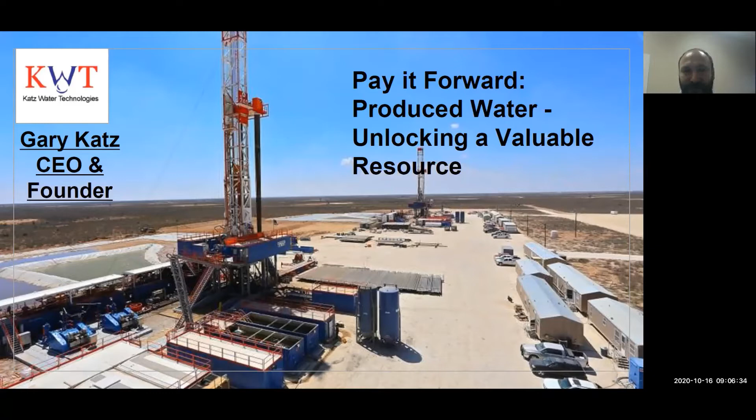My name is, as Salim mentioned, Gary Katz. My background is in technology with ExxonMobil, and then quite a number of IP law firms. I've had the experience of working for large corporations, medium-sized companies, and even startups, including now my own startup. So I've seen technology development in-house in a large corporation, I've seen it as an outside attorney, and I've now experienced it as a startup. So hopefully I can impart some knowledge to this group, and I appreciate the time.

So what I wanted to do is lay out the presentation. Whenever you try to start a business, you always have to start with the problem, because in order for a customer to give you money, whether for a service or a good, you have to solve a problem that's worth it for them. Then you have to make sure your solution solves the problem, and the fit of the solution to the problem is your value proposition.

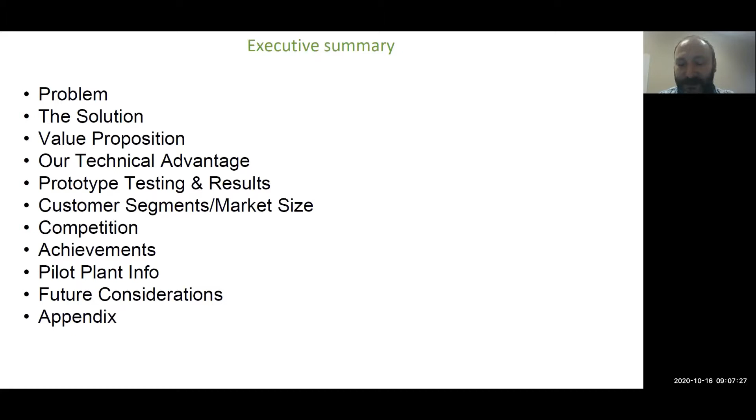A lot of people start with the technology, and we always have to make sure the technology is designed to solve a problem. We can never get the problem to fit the technology. So one of the most important things as an entrepreneur is to fall in love with your customer and your customer's problem, because then the customer will be willing to pay for your product or service, not fall in love with your technology. That's something I constantly have to remind myself. And that's the key to being a successful entrepreneur, particularly for engineers who are very good with technology. It's easy to fall in love with technology, particularly technology that you developed.

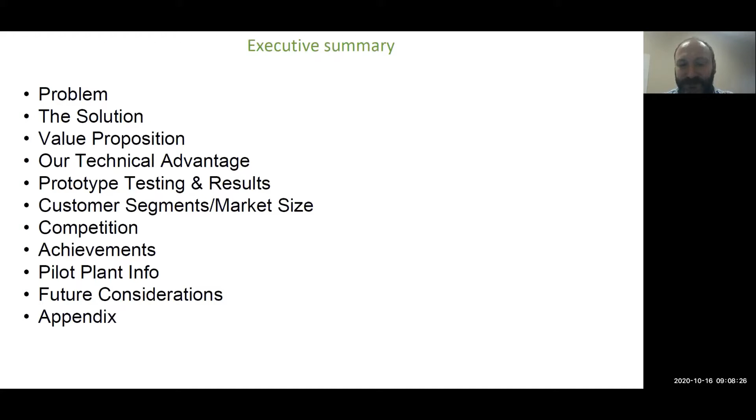Another aspect: we'll go into the prototype testing and results, and then go a little bit into the business side, the customer segments, the competitions, our achievement, and then future pilot plants that we're proposing, and other considerations if we have time.

So why did I start this effort? When I originally came up with the idea, water was very important. And as you can see in that map, Texas was in one of the worst droughts ever, and oil and gas at the time was booming, and we simply didn't have enough water for all the operations, and that included fresh water for operations, as well as the disposal water, which is typically disposed of at a disposal well.

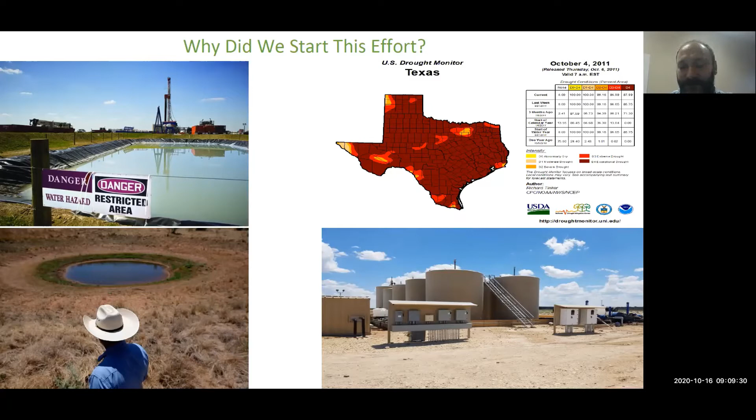And oil and gas was receiving quite a bit of bad PR, because they were competing with farmers and ranchers, and often farmers and ranchers couldn't farm and ranch because the oil and gas industry was using all the available water sources. Now, a lot of times the farmers and ranchers figured out that they can make more money selling the water than they can farming or ranching, but it was still bad PR. And of course, typically the media doesn't always tell the full story.

So what are some of the customer problems? We always mention that whenever you want to start a business, you have to solve a problem, and solve a significant problem that the customer is willing to pay for. So the problems that we were looking at were with the water, the infrastructure and cost issues.

Also, there's a huge gas flaring problem, and until recently there was no solution to it. The gas flaring problem is still there, but becoming less because we're drilling less. But if oil and gas ever picks up again, we know that the gas flaring problem is going to come back. And even though it's not as great as it used to be, it's still out there, and it's considered wasteful.

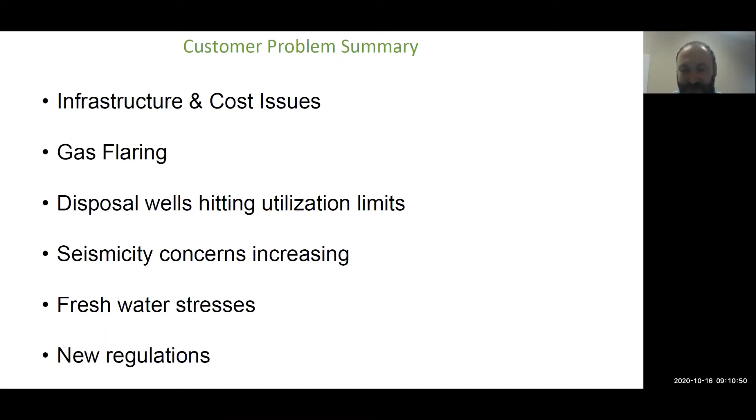We also have disposal wells. They're hitting utilization limits. As these disposal wells pressure up, we're having seismicity concerns. We also have freshwater stresses. We know a lot of these basins are in areas with stressed water. And everyone knows that in this industry, new regulations are constant, and everyone in the industry is expecting new regulations on water management.

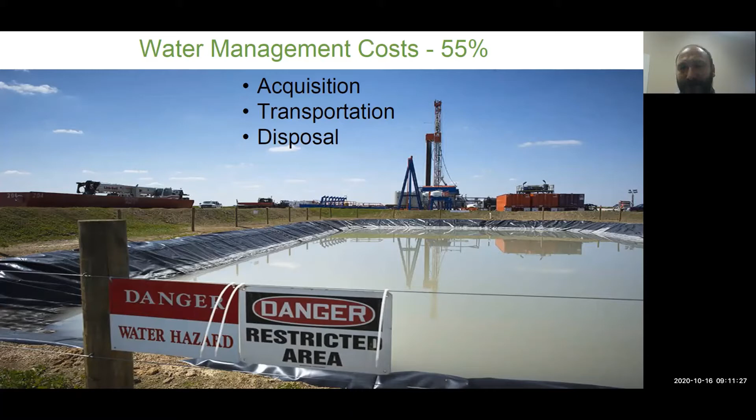So to basically understand the water management cost and how significant it is, in Texas, it represents 55% of the operating costs for a production well site. So that's the average well site in Texas. They spend 55% sourcing water and disposing it. And as you can see, it mentions the acquisition. The biggest component typically is the transportation, where you put the water in a pipeline or a water truck, and then the next biggest is the disposal.

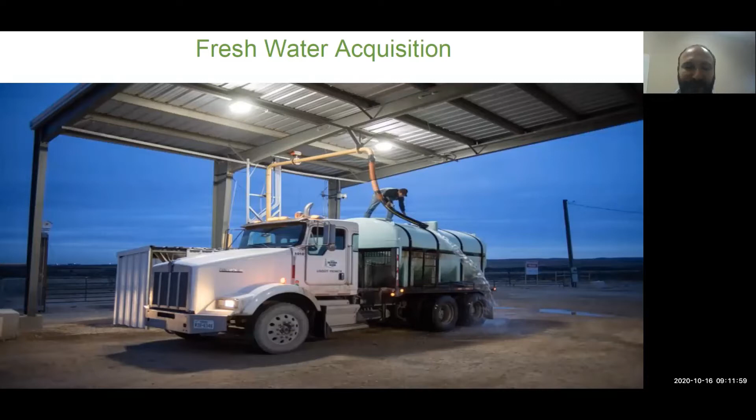So, freshwater acquisition: if you don't have a source of fresh water on site, typically it's put into large diesel water trucks and sent to the site. Now, more and more the industry is moving towards brackish, brine, and produced water, but there are some operations where you still need fresh water, such as if you're cutting the density of drilling muds or drilling fluids, and also some completions.

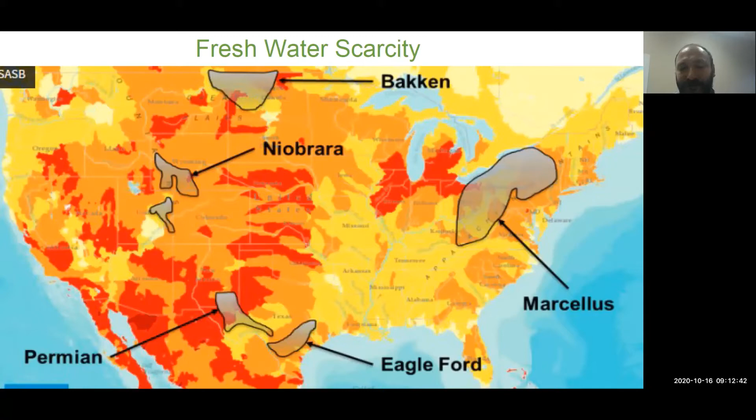Now, this is a map that shows freshwater scarcity and the degree in the U.S. And believe it or not, the U.S. is one of the better countries as far as scarcity, but you can still see that we have scarcity issues throughout the United States. And very often, the major petroleum basins, the oil and gas basins, are located in areas that are suffering from severe water stresses. So anytime you're taking water in these areas for operations, that means there's a PR and a political concern because there's that much less water for other uses.

I briefly mentioned the disposal. This is what a disposal well looks like. It's basically large water tanks where it's injected into a deep well under pressure, and the water is either fed by large diesel trucks like you can see in the bottom right, or pipelines leading into what they call gathering stations.

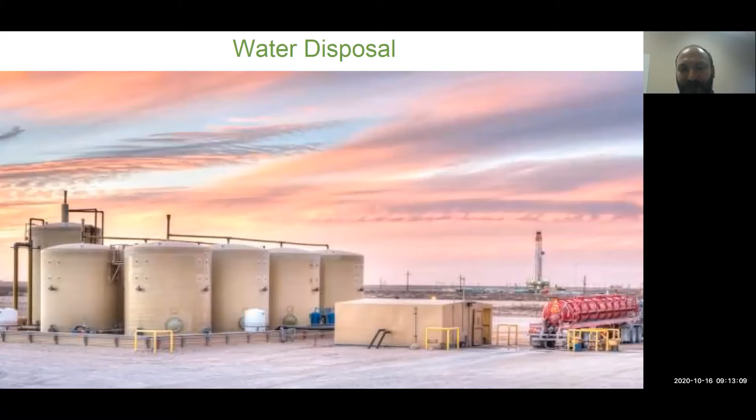Now this is a chart that shows the disposal well utilization limits. Now you can only pressure these formations so much before you run into serious issues, and typically the permits have volume and pressure issues, and more the disposal wells were hitting pressure utilization limits where they couldn't even put in the volumes that they used to because it was overpressurized.

So this was both a permit problem, and the problem was expected to get worse. It'll be interesting to see with the cutback of drilling if this problem's going away or it's going to continue. But even if the problem is reduced because of the reduction in production, once production increases, we'll see the same problem come back.

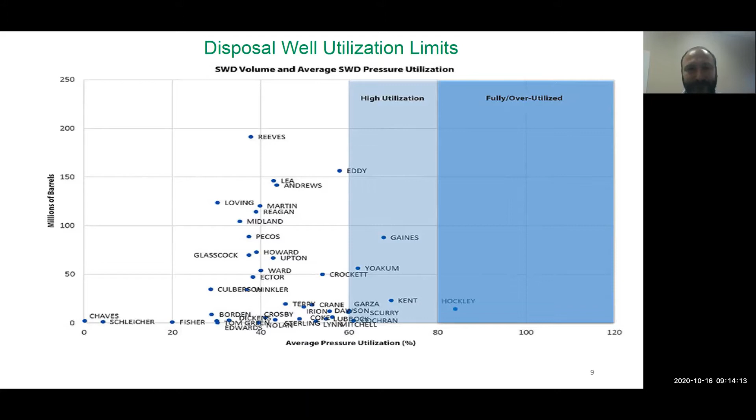Another area that's received quite a bit of media attention are the seismic concerns. And as you can see, this map shows quite a bit of increase in seismic activity, between 2009 over 2015, over the past nearly 20, almost 30 years, including Oklahoma, where they had several significant earthquakes that have caused problems.

And in Texas, we haven't had any major earthquakes, but we are seeing an increase of earthquakes, and it's directly correlated to pressure increases and pressure swings of disposal of water deeply, particularly if there's an aquifer, particularly if there's a fracture near the disposal well. And what we're discovering is very often it doesn't even have to be near a disposal well, because the pressure, depending on the formation type, can transfer over long periods of time, over long distances.

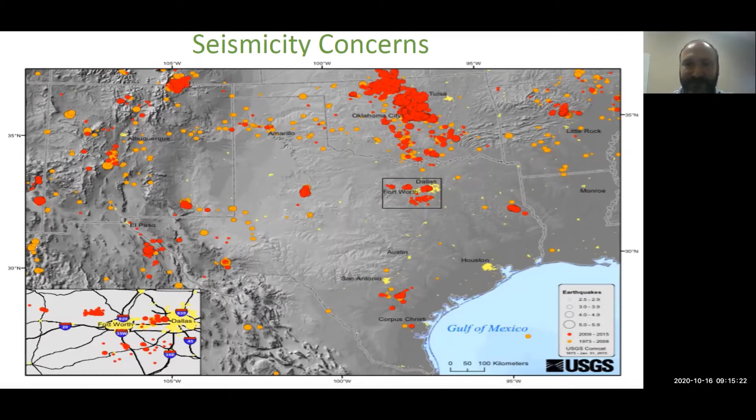Now, this is an interesting website, and this shows the increase. Texas and the Railroad Commission paid the University of Texas to put in a very sophisticated seismic monitoring system throughout Texas to understand the problem. And the University of Texas has been noticing quite a number of increased earthquakes over time. And so far, there hasn't been any significant property damage from these earthquakes.

But the concern is that over time, these earthquakes are going to become increasingly intense, like they did in Oklahoma. And in fact, Oklahoma had to severely cut back disposal wells, which seemed to help solve the problem. So the fear in the industry is if there's a major earthquake, there's going to be significant regulations, and there might even be regulations without a significant earthquake.

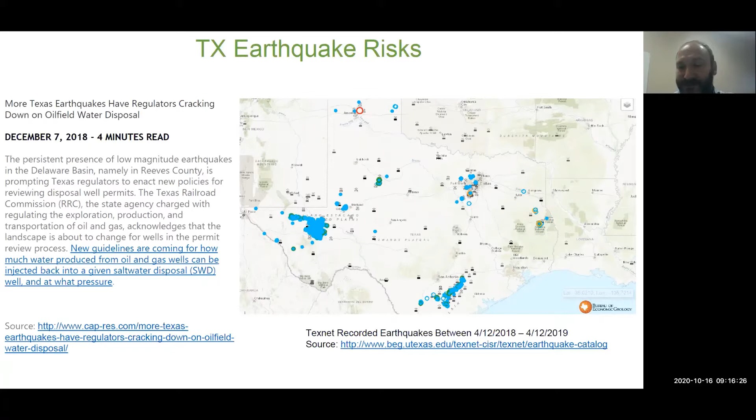And then you also have the water infrastructure constraints. Massive pipelines are being built. Some of these are hundreds of million dollar projects to move the water, both fresh water and the contaminated water, to disposal sites. And a lot of times these pipelines simply ran out of capacity. And as disposal wells were reaching pressure and volume, this had to be piped further and further.

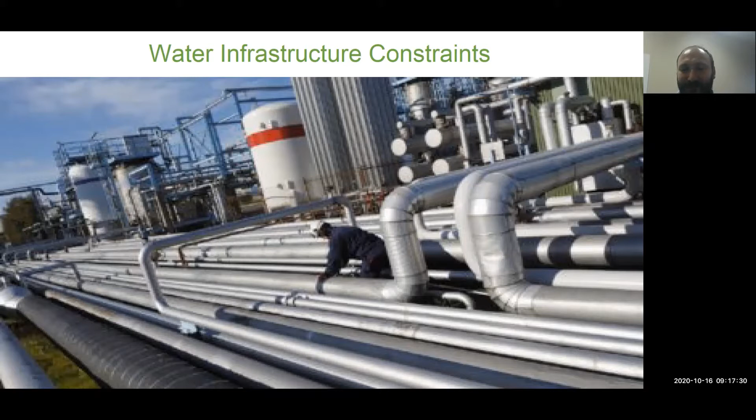In fact, in New Mexico, where water is much more of a significant issue, there was even a proposal to build a multi-billion-dollar pipeline system where water was taken from West Texas to New Mexico for the area of the Permian that was in New Mexico. And because New Mexico is much stricter on disposal and it's much more difficult to get permits, they were going to take the produced water back into Texas for re-injection.

And then finally, the other problem is gas flaring. Billions of dollars every year in the US and other countries is being wasted in gas flaring simply because there's no pipelines, or sometimes even when there's a pipeline, there's no market for the gas.

In fact, the Texas Railroad Commission recently had to issue gas flaring permits even when there was capacity in the pipeline, because the pipelines were charging to take the gas, and the producers said that if they had to pay the pipeline to take the gas, the oil field would become uneconomical. So in a 2-1 decision, the Railroad Commission ruled, very controversially, that you can flare for economic reasons.

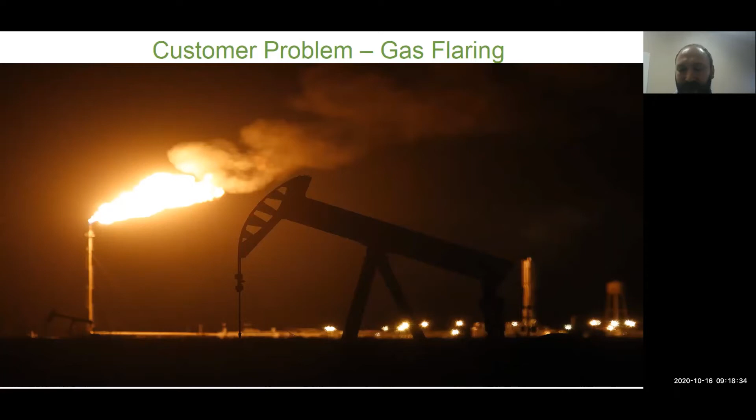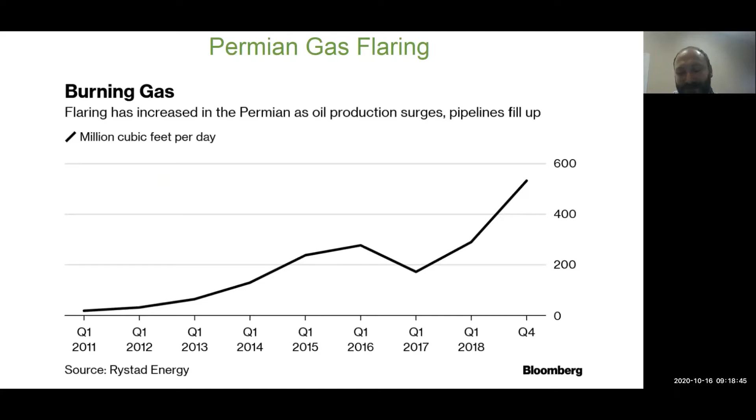There's a concern that depending on who wins the White House race, there would be stricter regulations on flaring. And this shows the massive increase in flaring. I need to update this because recently flaring has gone down with the production, but it's still a significant problem.

However, fracking is, depending on which basin you're in, 5 to 10% of the water management issue. So almost everyone is focusing on fracking, and there are companies that are already recycling the frack water. Typically they'll take flowback water, produced water, and they'll filter it to remove the suspended solids and to kill the microbes, which if not treated will cause organic fouling through a microbial explosion. They oxidize it, typically using chlorine dioxide, which is very cheap and very effective, sometimes ozone. And then that water could be reused.

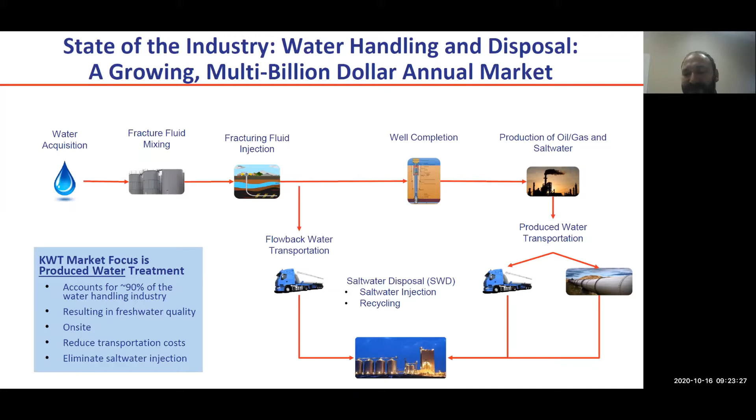Now, to give you an idea of the significance of the problem, in Texas, on average, for every barrel of oil produced, we're producing 8 barrels of water. And that heavily contaminated water is very often put into a pipeline, or put in a water truck, which are diesel, typically 18-wheeler Mack trucks, and sent to a disposal site. And it's very expensive, and there's environmental concerns with destroying the aquifer, as well as societal concerns that these trucks, particularly in rural areas, are causing traffic. They're ripping apart roadways. So anything we could do to reduce this has a societal, environmental and economical benefit.

So we mentioned that in order to have a successful business, you have to minimize or reduce pain points. And the problem is so vast, no one's going to solve this problem. So we have to minimize it. So our solution is to take the gas, which is very often very cheap because there's a glut of it in the U.S. Even the Henry Hub price is very low. And speaking to most of the gas producers, there's very little value in this gas, and very few are getting even the Henry Hub price, which is historically low. And some are still having to pay the pipelines to take the gas. So either take very cheap energy or gas that's being flared and use it to purify the produced water.

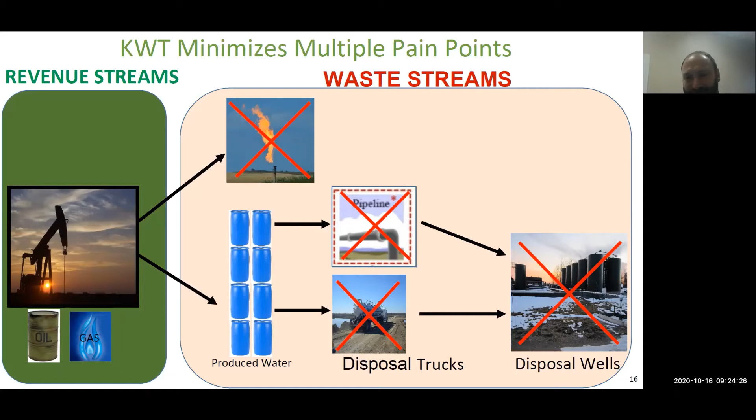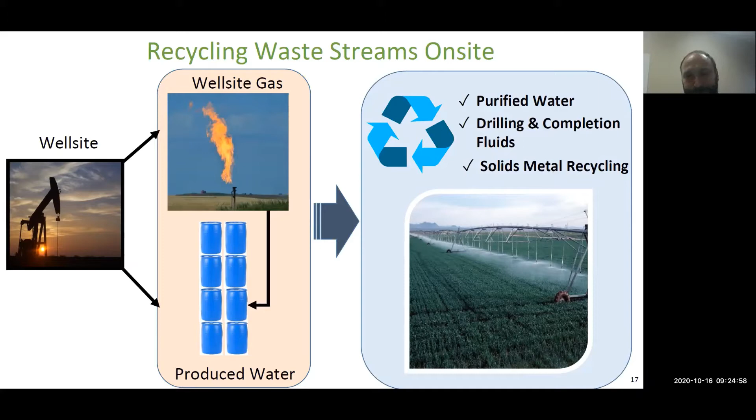And the goal is to reduce or eliminate as much as possible the pipelines, the disposal trucks, and the disposal wells. So what we want to do is take the gas, produced water, purify the water. You can use the water on-site, or use it for agriculture, give it or sell it to farmers so that there could be more farming and ranching in areas of water scarcity. And the discharge brine we could actually reuse as a drilling and completion fluid by controlling the density. So eventually creating a new on-site business model.

So the cost of disposing this production water is all over the map. If you're lucky and you have an on-site disposal well, the cost could be anywhere from 30 to 60 cents a barrel. If you have to pipe it, it could be anywhere from 10 cents to 50 cents a barrel. If you have to send it by a water truck, the cost is actually $1 and up. So the moment a water truck shows up, you know that the transportation cost is a minimum of $1.

And in fact, in certain basins like the Marcellus, which is a very important gas production region, and gas condensate, liquid condensate, they have to pay between $4 and $8 a barrel. And the reason why is Pennsylvania banned all disposal wells, so there's only a handful that are grandfathered in. So the water has to be trucked from the Marcellus in Pennsylvania all the way to Ohio for disposal.

So it really depends on where you are. So in Texas, which we're targeting, we figured a sweet spot would be between 50 cents to $1 a barrel, and we would target the well sites that have to bring in a water truck, because then we know that the cost is well over $1, typically $1.30, $1.50 or above. So then, if we could charge them to take the water off their hands, we could charge them between 50 cents to $1 and have a significant value proposition to them in reducing their disposal costs.

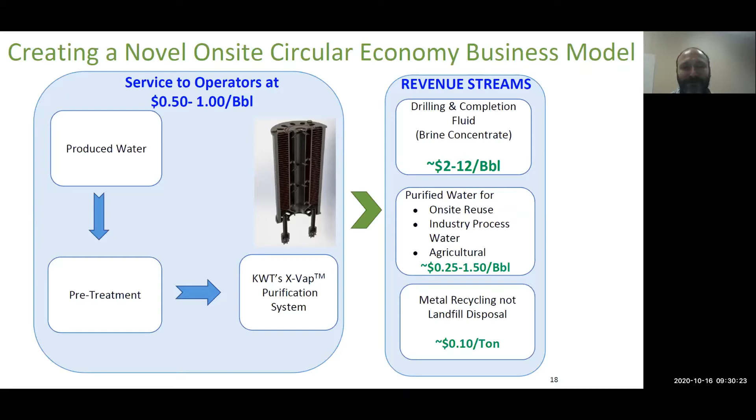So we have a great team. I brought in quite a lot of people. Jerry's been advising me. I think he's on the call. Paul Smith, many of you know him. He was formerly with Weatherford. He's our chief product engineer. Ramesh and Antonio. A lot of people have helped me.

Initially, when I had absolutely no money, I was bootstrapping. I couldn't even pay friends and family. And they did it for experience, and I'm very appreciative. And one of the things that I would point out is that quite a number of people helped me out in this entrepreneur's group. Not everyone I was able to reimburse, but several people who I never paid were actually able to use me as a reference and get jobs. And several people on the team right now were helping me out and even volunteering their time, and now I'm paying them through grants and money from funds and money that we've raised for the startup.

So what is our technical solution? As you can see, this is our first generation prototype. What we invented, patented and developed was a new thermal distillation system. For anyone who understands thermal distillation, or at least the process that we use today, it's a very complicated process, and there are large chemical plants that have to perform this.

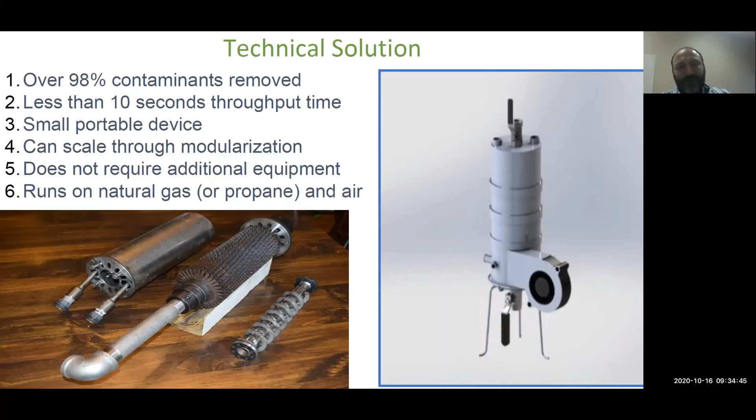And then for condensation, we can attach a pre-warmer, put a heat exchanger, so that not only do we condense it, but we also recapture energy and make the process more efficient. And we built our first prototype, and before we built it, we had to run simulations.

Here you can see an ANSYS Fluent simulation, in which we saw how effectively the heat will be transferred from the combustion chamber to the fin tubes. Now, to simplify it, we had to show each step separately, and here you can see the transfer of the heat energy to the water flowing down. And what the simulation showed is that as long as we get it to over 1,000 degrees Fahrenheit, the majority of the water can be converted to vapor.

Now, these simulations are very important. In fact, I'm looking for an ANSYS Fluent simulator going forward, and Carlos is working with me to help us find a candidate. So if you know anyone that's experienced in ANSYS Fluent, and particularly if they have a recent PhD, we can get them in through a very great NSF postdoc program. But if not, I'd still be willing to talk to them. And that can do multi-phase flow, both liquid and vapor, which is very difficult, but very valuable for what we're doing.

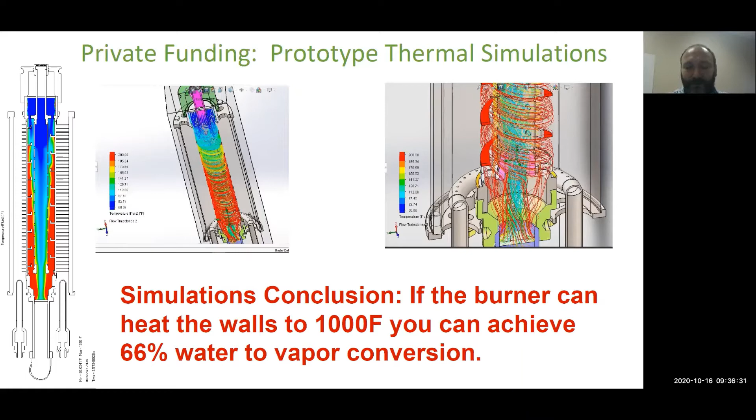So I'd like to thank Carlos, and this is how a network can help. Carlos is starting, with others, a company to help companies find talent, and we're working with him. So, like Carlos says, you want to have as much networking as possible.

So here you can see our prototype testing. This is our first generation, very simple device. You can see the scale, very small. We were testing it in both Paul's garage and my garage, and we were powering it with propane gas. Now we're running it on natural gas or compressed natural gas, and condensing it into a bucket. We don't even have the pre-warmers.

And with this small little device, we were able to remove over 98, now we're over 99% of contaminants in a single pass-through of under 10 seconds. And what is really unique about this is there's no mechanical moving parts. It's gravity fed.

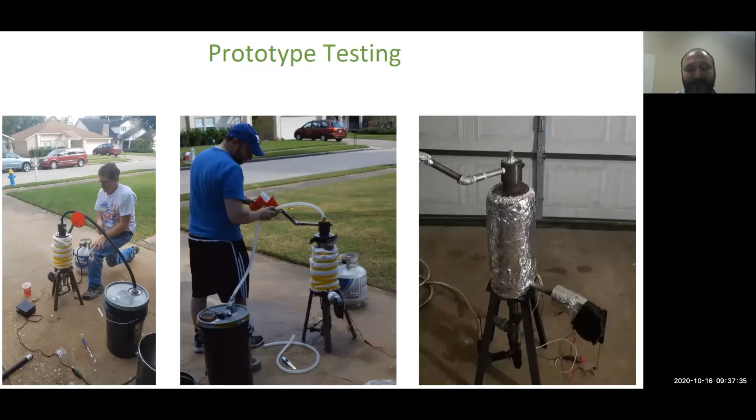So the only thing that will cause a failure is corrosion, fouling, or scaling. And because it's a short residence time of under 10, now we do it under 12 because we're using slightly bigger equipment, there's not enough time for scale and corrosion to form, which is very promising. You can see our lab results.

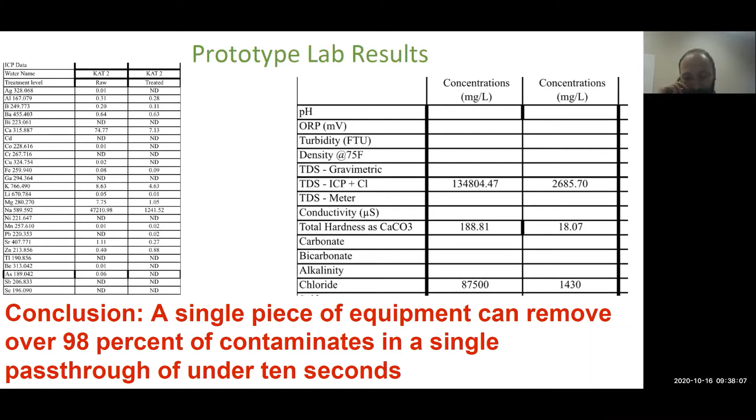Now, what we did is we took these lab results, and initially I applied for NSF funding. I tried to get investors behind me. No one believed it. Once we actually bootstrapped and were able to build a prototype, I had to beg a family friend to lend us some money to do this. We were able to send this to the NSF, and they gave us phase 1 funding so that we could build better and bigger systems and field test it.

While we were there, a water truck showed up, and we were able to talk to the water truck driver, and he gave us some very valuable information. That same truck also delivers to well sites both fresh water and brine. He even knew a little bit about the pricing structure, which confirmed to us that if we were able to produce fresh water and brine on site, instead of having to pay that truck to take the disposal water, that truck can then be profit or revenue generating, taking fresh water and heavy brine to other sites.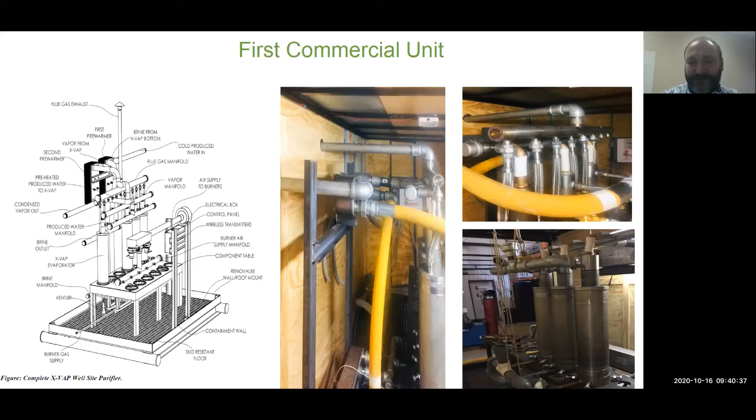So basically, you can see the evolution of the technology from a simple modified heat exchanger to actually a system, to putting it inside a trailer to be able to run it on site by simply connecting to the water line and gas lines.

So we're proposing some field trials, some larger ones with a major and an independent that's probably just below major. And so we're doing schematics of how to do it. This would be at the water gathering stations where they're re-injecting, where we attach our system and then have the trucks take the brine and the water to the different storage tanks or to the end users.

Now, one of the most important things we had to do throughout the process is customer discovery. And we worked with several different organizations. Probably the best one was what's called the NSF I-Corps program. And they have different versions of it. The main ones are a regional program and a national program. And the regional program is run by a regional node where several of the universities are running it. University of Texas, Texas A&M, and Rice are among them.

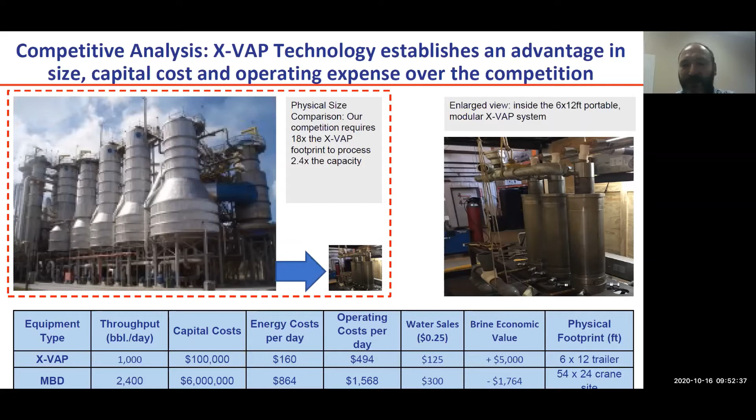So it just shows that thinking outside the box can scare even the largest companies in the world with the bootstrap technology that was developed in a garage. Now, even though Veolia considers us competition, I know better, we're not, because no one's even remotely considering using them. So our competition really is the disposal wells and the midstream companies.

So IP, it's very important because once you prove a technology, you have to protect it, so we filed patents. We have 3 issued. We actually have 3, instead of 2 out, it's now 3. We have filed 13. That should be 15. We filed 2 more. We've trademarked some of our names, copyright, and then even trade secrets are important. So our algorithms, our operating data is very important. So if someone wants to see that, we require them to sign an NDA.

So what's our go-to-market strategy? Now, I am talking to some of the biggest companies in the world about doing a large pilot plant, but really, right now we're funded with an NSF grant. It's just enough to get by. We also borrowed some money from investors. But really our commercial pathway is to go to the small family-owned offices, like the family that owns that small production site in Spring, Texas. And that's typically less than 1,000 barrels a day. At that site, it's about 100 barrels a day.

And you can see the test samples from that site where you have the produced water. We concentrate it to heavy brine, and you can see the condensed vapor, which is fresh water quality. So that water was approximately 150,000 TDS. We condensed the brine to right around the 10-pound drilling mud, which is around 260. And the purified water is under 500 TDS, which is actually fresh water drinking quality. But EPA regs will not allow us in the US.

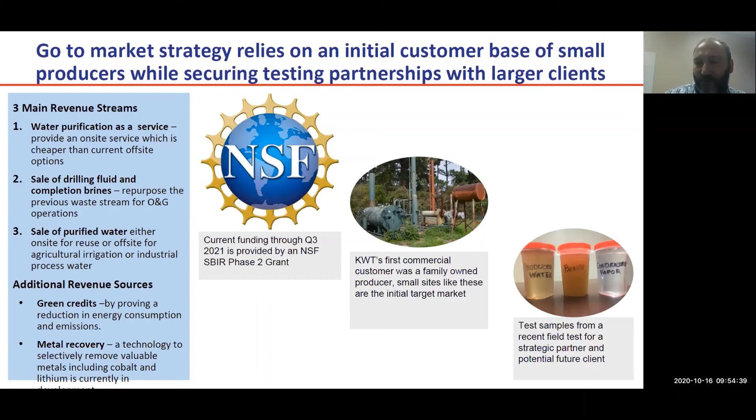Maybe in other countries, this would be better drinking water quality and could be used as drinking water. So we had to do revenue and show that we had, for investors, a profitable margin. But because we could take a costly water product and recycle it into valuable components, you could see we have the potential by adding 12 wells a year and then doubling it. These are very small wells of under 1,000 barrels per day and have a very sustainable revenue model in there. Based on our market research, there's approximately 8,000 wells that initially we could target.

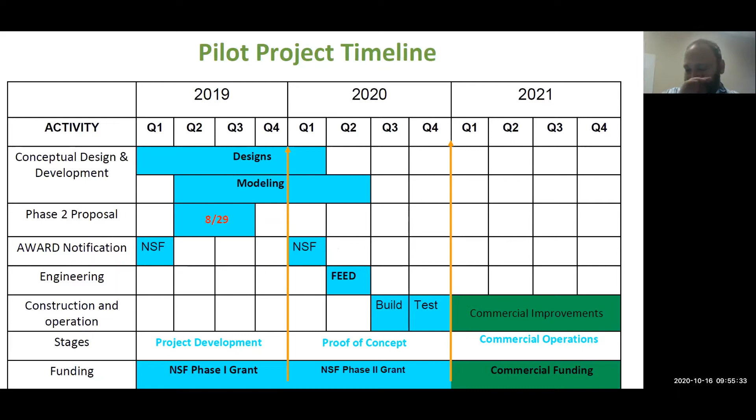So this is our timeline. I know I'm running out of time. So you could see last year and this year we were funded through an NSF grant that's going to run through 2021, in which case we're going to have to transfer to commercial funding and commercial improvements. So I'll go quickly over our proposed field trial. This is a larger one.

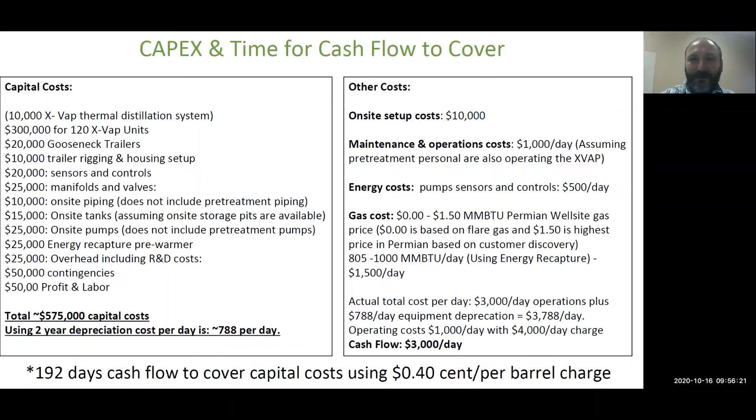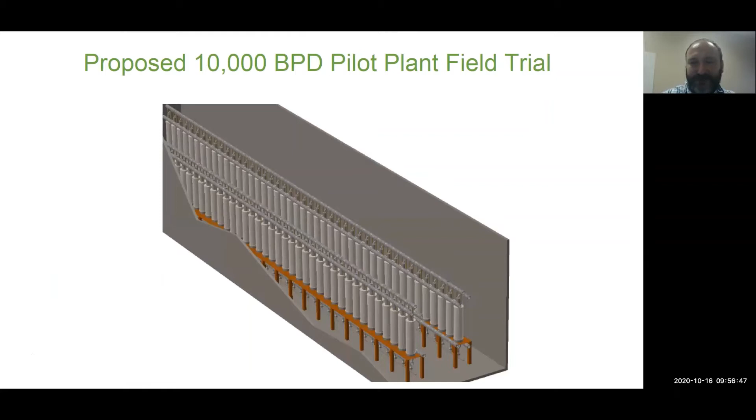Here we have a site placement and flow diagram for 10,000 barrels per day. And this is a rendering of our X-VAP thermal distillation system in a shipping container to show what it looked like on site, so we could scale up by putting additional shipping containers. We're not here yet, but our goal is to get there in 2021.

So considerations with working with these companies: confidentiality. Some companies want absolute confidentiality, some don't. The cooperation structure. Are we doing this as a research project? Are we doing this as a consultant, a contractor? Publicity. Some want publicity, some don't. And inviting other parties. Benefit will be cost sharing. Some companies are willing to work with others. Some want us only to work with them. So those are all considerations. We're working with investors. There's matching funds as far as our NSF grant, and we've also taken some loans.

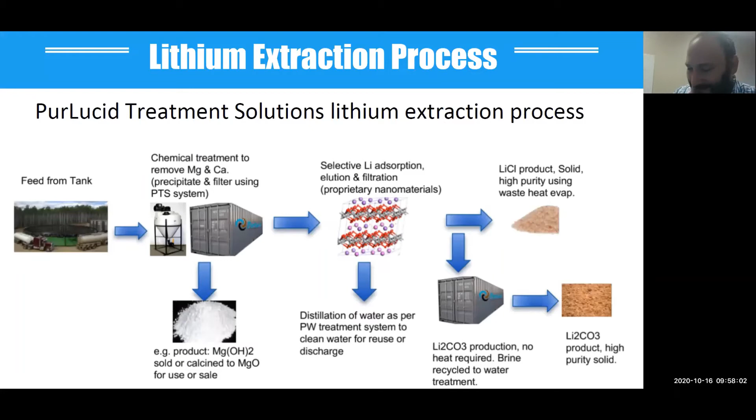Another interesting component that we're working on is people are looking at extracting valuable metals and minerals. We've talked to PurLucid, which can extract lithium if it's in greater than trace amounts from the produced water using their technology, and we could do a license agreement with them.

More interesting technology is I'm working with a company called New Arrow, and they were a technology spinoff from Statoil, and they have a microbial process where initially they injected microbes. Now they're injecting nutrients and causing a microbial explosion of microbes that can repel water but will allow hydrocarbons through. So for an EOR situation, it's very valuable because it increases the hydrocarbon recovery rate while reducing the water.

So we're actually now working with them, and we filed several patents on using microbes to selectively remove valuable metals and minerals. And we found microbes for just about every critical material out there, including the ones that they're scrambling to find domestic supply for because most of it is coming from China. Lithium, nickel, cobalt for batteries, and rare earth elements for the high tech.

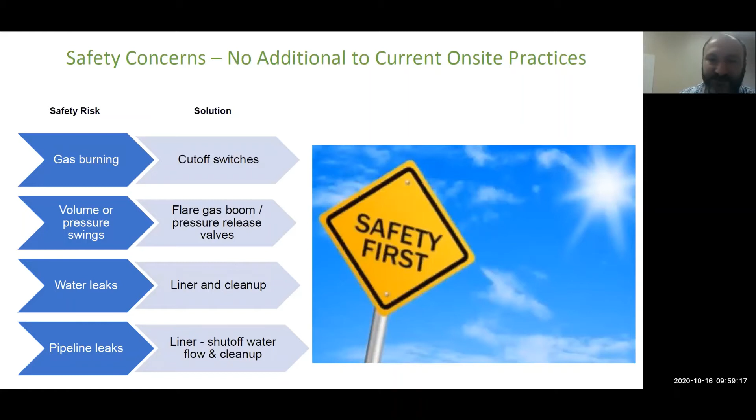So for the safety concerns, we had to do this for one of our majors, show all the safety considerations, ESG, the sustainability benefits. Now sustainability has three components. You have your economic, which are the benefits, which is reducing costs and recycling. Your environmental, which is reducing freshwater withdrawals, reducing seismicity, and also the vehicle miles traveled emissions. These are heavy diesel trucks producing considerable CO2 with the runs on the water trucks.

And the societal benefits. So we want to reduce the depletion, use less fresh water for oil and gas, and then reduce road congestion. And by reducing the cost for the producers, we're making energy cheaper for everyone, and that's a net benefit because when energy costs rise, the ones that are hurt most by it are the poor and middle class. So all these are benefits to society.

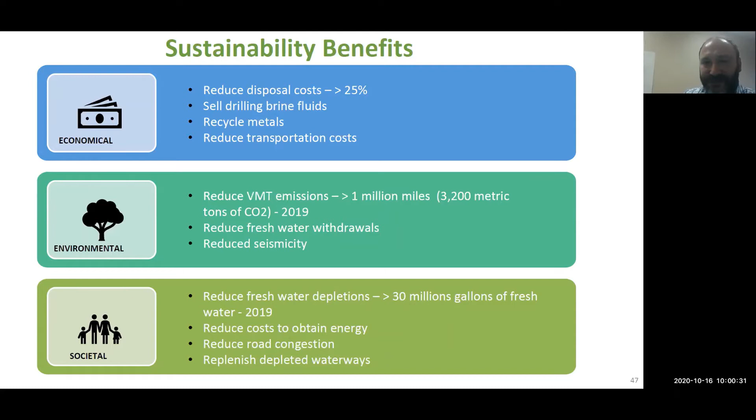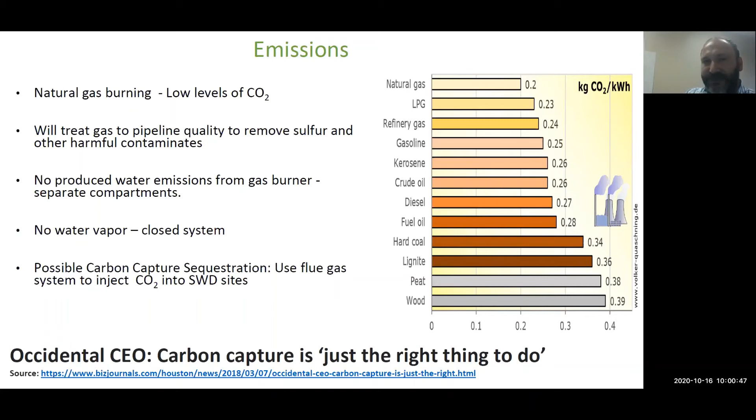We talked about the emissions, natural gas as one of the lowest emissions, and we're even working on carbon capture. Since we're going to be at the well site and burning the gas in a controlled manner, we can re-inject the CO2 we produced on site. So we have a number of achievements, and I think I'm out of time.

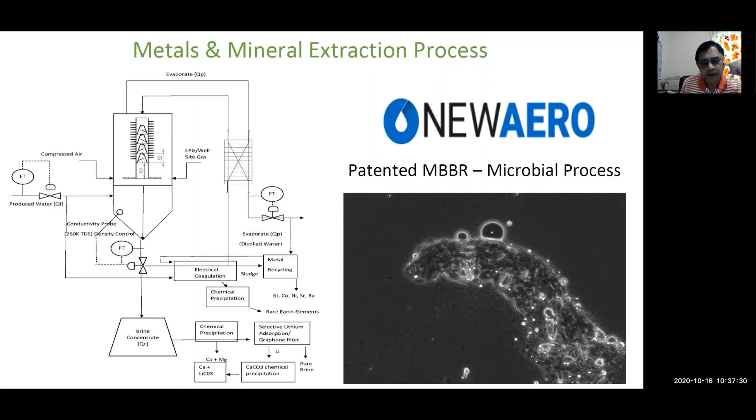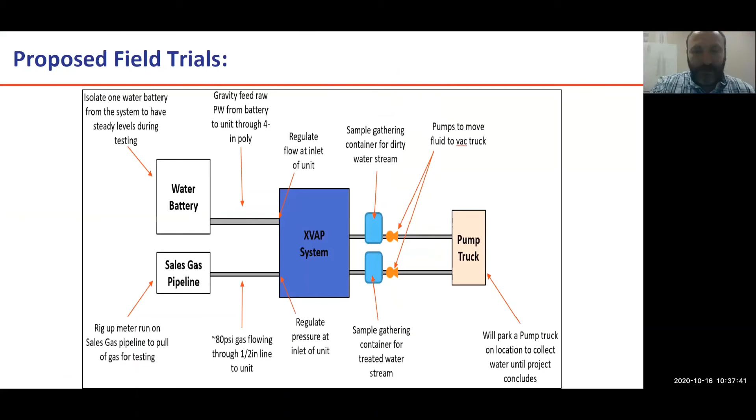Hey Gary, can you use a pointer? Do you have a pointer available some way? No, I don't. Being a tech startup, I should probably be high tech, but I'm not. Yeah, that's causing me difficulty following what you're saying. You've got to kind of point it. Let me see if I can find a simpler diagram to show what we're doing. Okay. Does the cursor show on the screen? Oh, you want me to use a cursor? Yeah, why don't you use the cursor, please? Okay, that would be good. I'm no longer looking at people, so if they want to, they can actually make faces at me. No, that's fine. Don't worry. Okay, so can everyone see the hand?

Yes. Okay, so as you can see right here, we have the XVAP thermal distillation system. What we do is the gas is coming in on the bottom. We have an air supply coming in here. We have the mixture of gas and air in a combustion chamber with the fin tube heat exchanger that transfers it. Now, in here, one of these is the produced water coming in, another one is a brine exit line, and the other one is a vapor. So the flue gas comes in here and it comes out this chimney.

If we were to capture the CO2, we would have a capture system, maybe some type of almost like a catalytic converter to remove everything but the CO2 and then re-inject the CO2. These two devices are plate heat exchangers. Those are pre-warmers, one for the brine and one for the vapor. The condensation occurs when we run it through the pre-warmer, where the produced water coming in is warmed first through the brine, then the vapor, and it's very hot, almost at thermal distillation before it gets in the system.

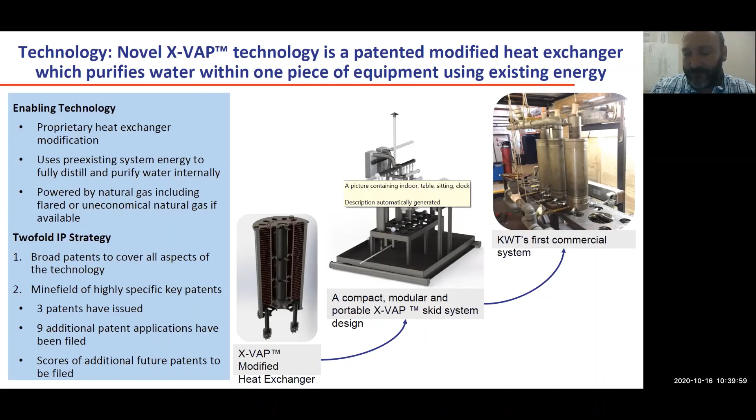The system separates the vapor, which then goes to the heat exchanger and is condensed as it's pre-warming. And the brine, which is the heavy metal salts, is also sent through a pre-warmer and then sent outside for storage. Now, if we were to recover the valuable metals, we could recover them through the pre-treatment system, which is not shown, such as electrical coagulation. And we can also recover them from the brine through a microbial or chemical precipitation process.

So did that help explain it? Yes, it does. Thanks a lot. I appreciate it. Okay. All right. Should I go back? If anyone's making a face, I'm now watching you.

Does anyone else have any other question? Otherwise, I want to pose to Gary my other questions. Okay, go ahead. I have a question too, Salim. Yeah, go ahead. Then let me give you a chance.

Yeah. No, Gary, I have a personal question. I want to have a phone conversation with you offline. What's the best time to call you? Salim, can you email my phone number? To Mamdouh? Yeah, Mamdouh's email. Yes, I can do it. Yeah, I think I suggested Mamdouh to contact you. Is that the one, Mamdouh, you're talking about? Yes, yes. I wanted to talk to him, but after the presentation. I'll send you his phone number later. You can call him.

Great. Mamdouh, today I'm very busy this afternoon because I actually have a patent deadline. So what I would do is maybe email me on Monday, and we'll set up a time either Monday, Tuesday, or Wednesday. Okay? Great. That sounds good. Thank you very much, Gary. Okay, Subhash, go ahead with your question.

Okay, sure. So my next question was on the desalination, the slide that you have on the screen right now. How does this setup that you're using, or thinking of using in the oil field, apply to a large scale desalination project? And how effective or ineffective will that be? Yes.

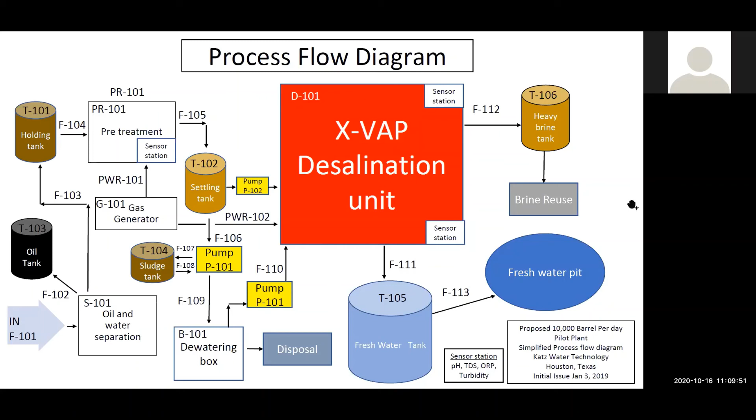I agree with you. The application for an injection well or water disposal well that Gary alluded to earlier, those injection well permits require you to specify the pressure gradients, the radius of investigation, what radius it will affect, how close you are to the fault and all that. So if the state of Oklahoma was lax in regulating those, then that could have played a role compared to, say, the Texas Railroad Commission.

Gary, I'll put in my 2 cents following what Mamdouh has said. I think this seismicity can occur by all three means that he mentioned, but you have to separate them out.

And one is the case is in Oklahoma, the faults are shallower, whereas in Texas, most of the faults are really deep-seated. So when they're doing this, even from fracturing, they had seismicity. And this seismicity is because of the fact that with these faults, when you're fracturing, if there is a shear fracture that happens, shear slippage, that is what causes your seismicity, not the compressional stresses or anything.

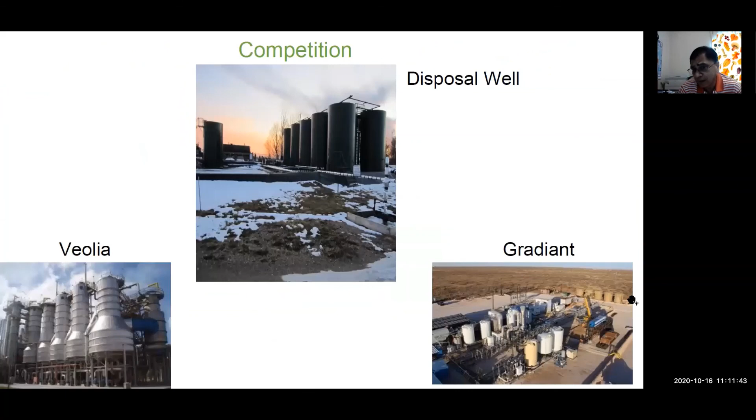On the other hand, when you're injecting a lot of disposal water back into the formation, injection wells or disposal wells, you are creating higher pore pressure. So what happens here, effective stress, which is the stress minus pore pressure, the effective stress reduces. And then that in turn can cause slippages. So yes, seismicity is caused by both these phenomena.

And the third one that he mentioned, rapid rate of production, that can cause it as well, because the pore pressure issue comes back again. But I'm not sure percentage-wise of these three which one has the highest effect. And that's why with environmentalists, I think to some extent they're right about fracturing, if you fracture close to a fault zone, as has been done in Oklahoma State.

Another thing, especially in Oklahoma, as you said, they use the natural fractures as a high permeability zone where they can expand the disposal away from the well. So with that, they generate fluid slippage on these fractures, causing local seismicity along the fractures themselves due to the movement of the hanging wall on the footwall. And that's due to lubrication with the injection fluid.

So again, I am saying that the injection related seismicity and reactivation along the fracture zone need to be a category by itself, different than any other seismicity, because the other seismicities are much smaller and much safer than the reactivation along these fracture zones.

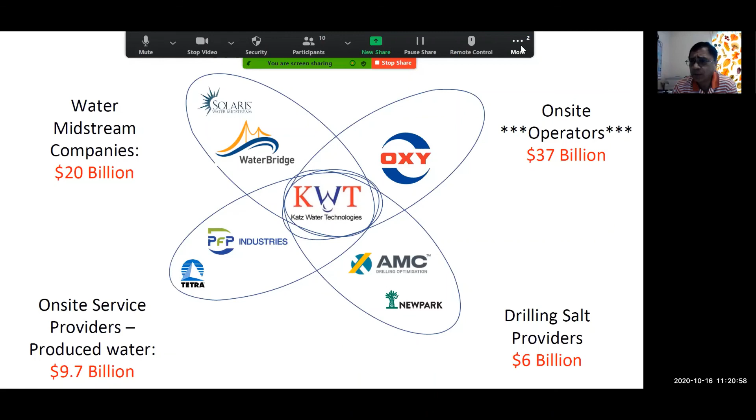I used to do a study on environmental issues back in West Bengal of India, as well as the northern part of Bangladesh. There is a huge arsenic layer. A lot of people drinking potable water are getting skin cancer from it. So that's why it came to my mind, how many of those arsenic-rich layers exist in the United States, in the places where we're producing produced waters. So anyway, are there other questions for Gary at the moment?

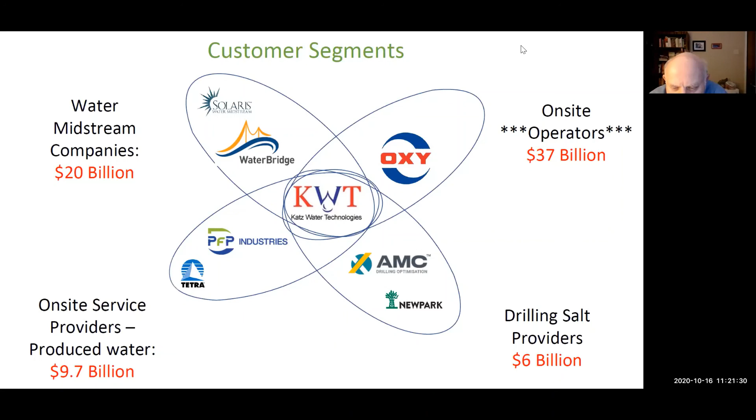Hey, this is Jerry Greenbaum again. What I was going to tell you, if you go out to the Permian Basin and you get produced water, that's the worst water in the whole world. It's that black, stinky water. You ever looked at it? And that's all reservoir specific. When that water comes up, you're getting everything from drilling mud to whatever else they stuck in that well, and that all comes out. So every well is different.

But the point is that traditionally in the Permian Basin, they brought that water up and put it into an injection well. They never would treat it, because in a lot of those fields there's also water floods going on. So they have a big mess out there because that produced water is causing a lot of problems with the water flooding. Water flood used to be used as a secondary recovery process in the Permian Basin before they started producing from unconventional. A lot of times they're still doing it in some of those fields. Some of the zones, yes. You were right.

So if you get the water analysis of the produced water, you're going to see it's worse than seawater. You know, seawater is 35,000 parts per million. This stuff could be everything in the world that went on out there. Most companies don't want to mess with that. That's why they injection well it.